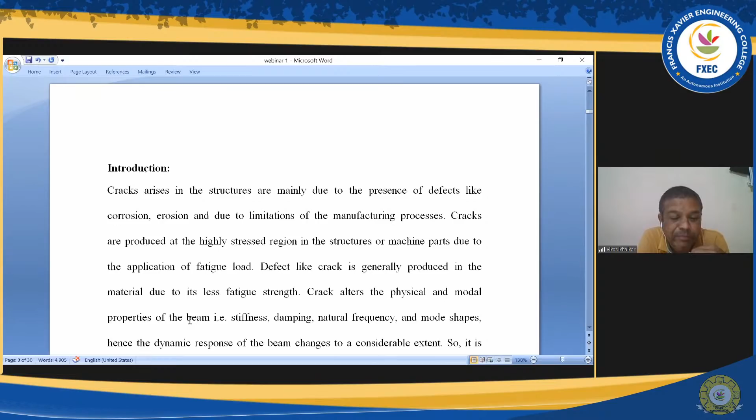Our expectation is that the structure should not fail. Because of that, we should do structural health monitoring of the cantilever beam. Suppose the cantilever beam is carrying a crack, then in the earlier stages only we should locate or identify the presence of cracks in the cantilever beam, so that we can avoid catastrophic failure. Because of that, this study is very important.

Vibration based crack detection is divided into two types. One case corresponds to the forward problem, and another is the inverse problem.

Now I will give some introduction regarding the forward problem. In the forward problem, what do we have to do? Artificially, we take cracks on the cantilever beam, and we disturb that cantilever beam using an impact hammer or vibration exciter or something like that. We check how the dynamic response of the cantilever beam changes. Dynamic response means natural frequency, resonant amplitude, stiffness, mode shapes, and all that.

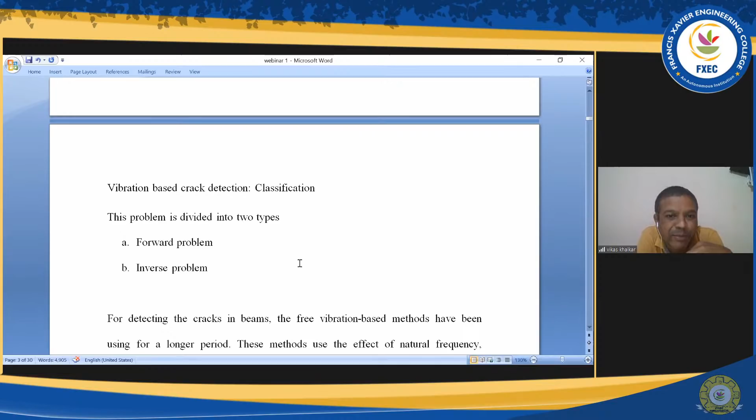Now we will look into the first case. The title of the first case is: study of free undamped and damped vibrations of a cracked cantilever beam. It is better to explain with the help of a diagram, so I will do that. In this particular study, I have considered 21 crack cases.

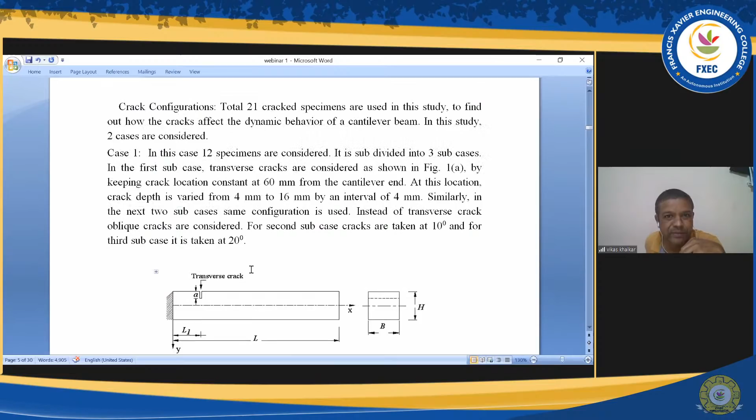On some specimens I had taken transverse cracks, and on some specimens I had taken oblique cracks, meaning 10-degree oblique crack, 20-degree oblique crack, and so on. I studied how the dynamic response of the cantilever beam changes because of the presence of transverse cracks and because of the presence of oblique cracks.

Now the question is why I considered transverse crack and oblique crack. Suppose our structure is carrying some localized defect right now, it is not necessary that the defect should be like this one; sometimes the defect will be oriented differently.

Your localized corrosion will be like this. Sometimes the orientation of the localized corrosion will be like this, and sometimes it will be like this.

Suppose our cantilever beam is carrying an oblique crack, then we must know the effect of oblique cracks on the cantilever beam. Now suppose our cantilever beam is carrying a transverse crack, then we must know the effect of transverse crack on the dynamic response of the beam. Cracks will definitely be either transverse type or oblique type, and we should know how the dynamic response is changing for these kinds of cracks.

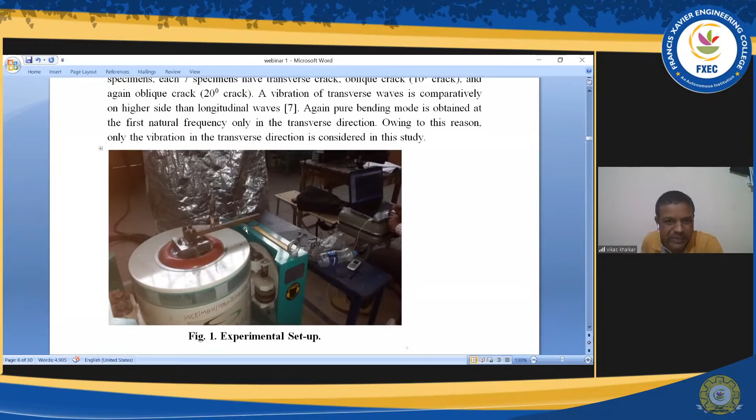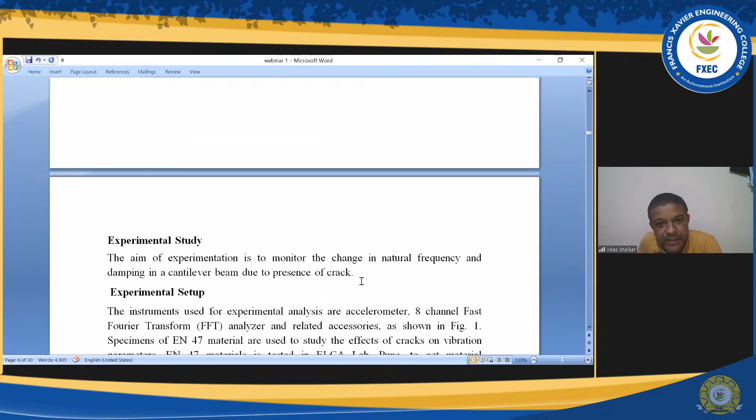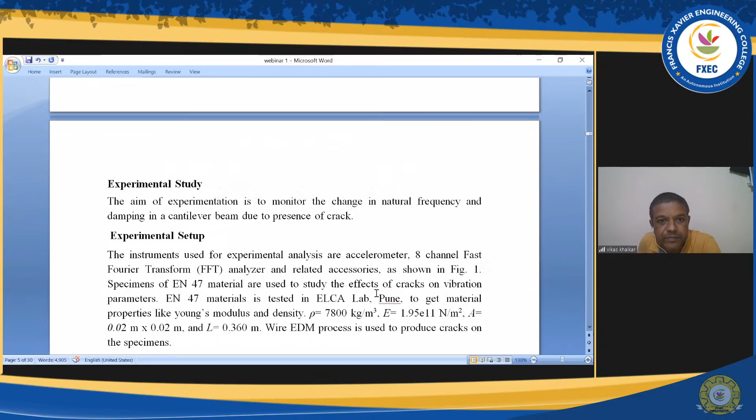I will show you the geometric properties I had taken: the cross section is 20 mm by 20 mm, and the length I had taken is 360 mm. These are the material properties I used; in earlier days I had tested all these properties in ELCA Lab, Pune.

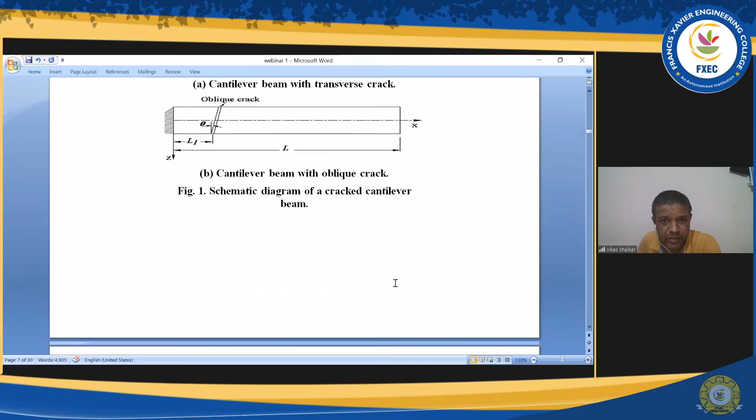In the finite element analysis, first I created a model with these geometric properties, and afterward I created required cracks at the required locations. Afterward, I meshed the finite element model using the solid 186 element. I used solid 186 elements because this is a 3D model, and due to that I preferred solid 186 element for meshing this particular model.

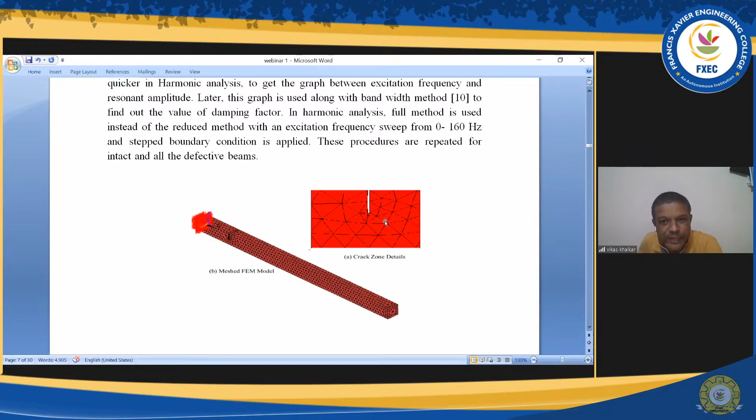Now, using this particular graph, I had calculated the value of natural frequencies and damping factor.

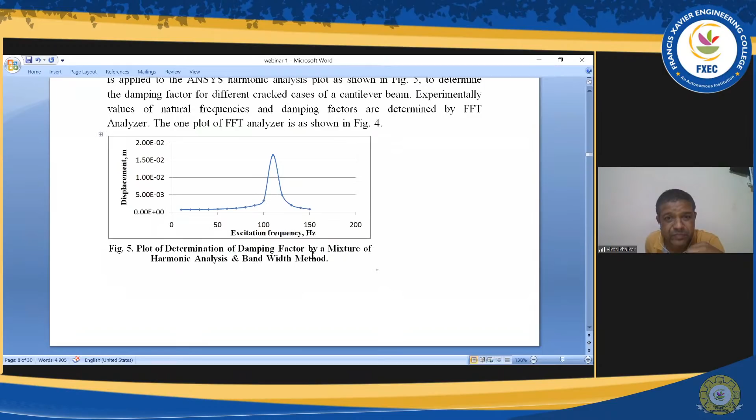For calculating the value of damping factor, I used this curve. One formula is there: 2 zeta equals f. What I did was plot one horizontal line at a distance of 0.707 times of this peak amplitude. I got a line over somewhere here, and this was f2, this was f1, and using the bandwidth method, I calculated the value of damping loss factor: 2 zeta equals f2 minus f1 upon natural frequency.

Peak means this highest point we have to project on the x-axis, and that point, that line, will intersect the x-axis over here, and this point will give us the value of natural frequency. So this is natural frequency, and f2 will be this value, f1 will be this value. And the distance of this horizontal line is 0.707 times of the peak amplitude.

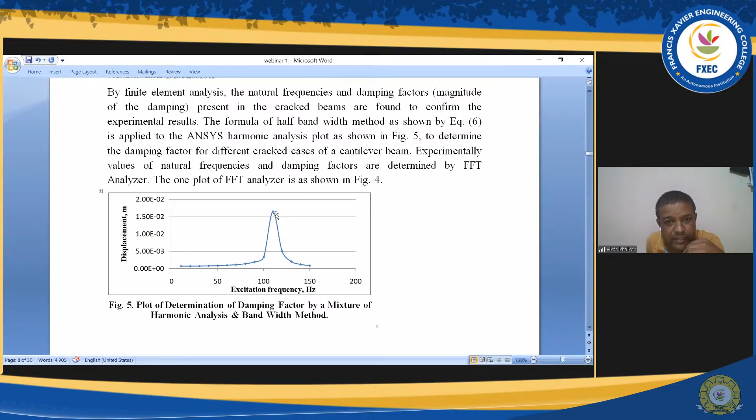Now I will expand the number of graphs. First graph is between variation of natural frequency ratio versus crack depth ratio.

Now first of all, we must know what is natural frequency ratio. It is the ratio between natural frequency of cracked beam to the natural frequency of uncracked beam. It is called natural frequency ratio. The value of natural frequency of uncracked beam is always greater than natural frequency of cracked beam, so if we are considering a crack beam, the value of this ratio is definitely less than 1, because the natural frequency of crack beam is always less than that of uncracked beam.

And the x-axis indicates crack depth ratio. Now what is this crack depth ratio? From the diagram I will show you. A indicates crack depth and D indicates depth of the cantilever beam. Then what is crack depth ratio? It is the ratio between depth of the crack and depth of the beam. It is called crack depth ratio. I think you all understood.

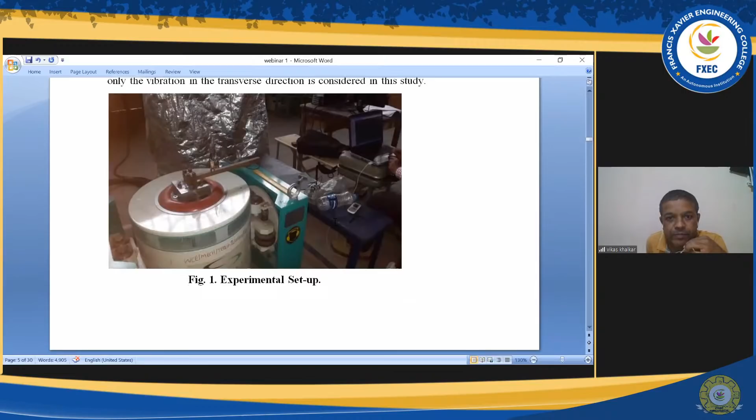Suppose we are increasing the depth of the crack in the beam, at that point what will happen? The value of natural frequency ratio is going to decrease. Here I used the symbol R for indicating the natural frequency ratio. Once again, suppose we are increasing the depth of crack in the beam, then the value of natural frequency goes on decreasing.

Now what is the reason? Suppose we consider a small crack depth, this particular point - since the value of crack depth ratio is less, we are considering small crack depth, and for small crack depth the value of natural frequency ratio is large. Suppose we consider this particular point, where value of crack depth ratio is more, then we get less value of natural frequency. And for this particular point, value of natural frequency is least.

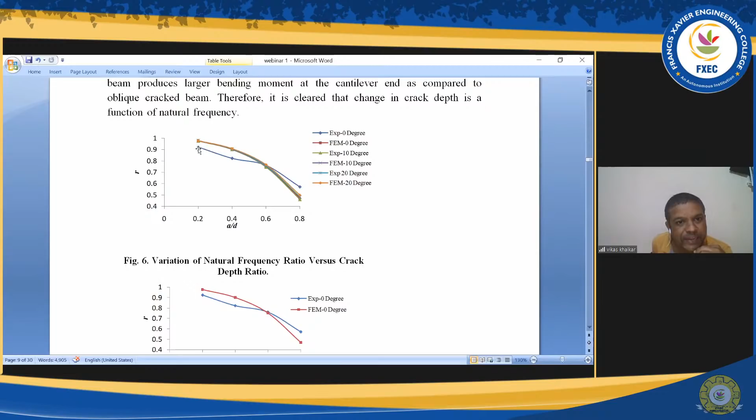That I will show you over here. For 20 degree crack it is maximum, for 10 degree crack intermediate, and for transverse crack or 0 degree crack comparatively less. Now I will explain this from this diagram.

This is transverse crack. Because of the transverse crack, the largest value of bending moment is produced at the crack. Now suppose we are considering an oblique crack in the cantilever beam. At the same location we have to take one crack, and we have to maintain the same crack depth. Suppose we are considering two cases, a case of transverse crack and a case of oblique crack. Then location and crack depth

we are not supposed to vary. We have to maintain the same location for this crack, and we have to maintain the same crack depth for this crack and for this crack case. We just have to change the orientation of the crack. This is transverse crack, meaning your crack will be like this in the top view, and in the oblique crack it is like this.

Because of the presence of transverse crack, the largest value of bending moment is produced at the crack, and because of that the effect of damping remains comparatively more for this particular case. Now see this oblique crack. In this oblique crack, it is going towards the free end. This is the free end, and this oblique crack is going towards the free end, like this.

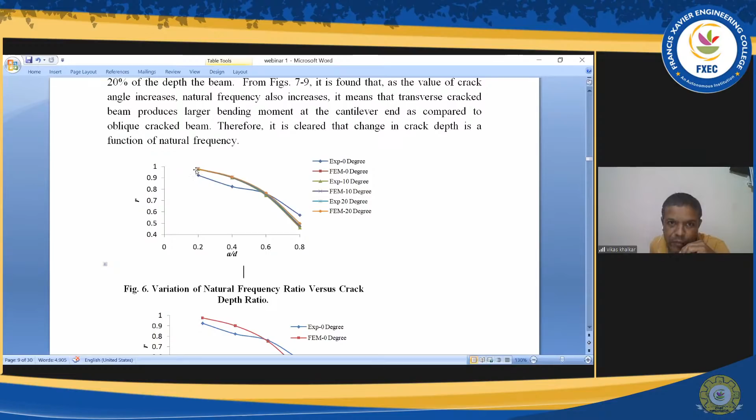and because of that for this case we are getting a comparatively larger value of natural frequency. That I will show you over here, for 20 degree crack. Just see, for 20 degree crack we are getting a larger value of natural frequency, because whatever damping effect we get at the crack, it is comparatively less with respect to the case of transverse crack. Because of that we have got the largest value of natural frequency over here.

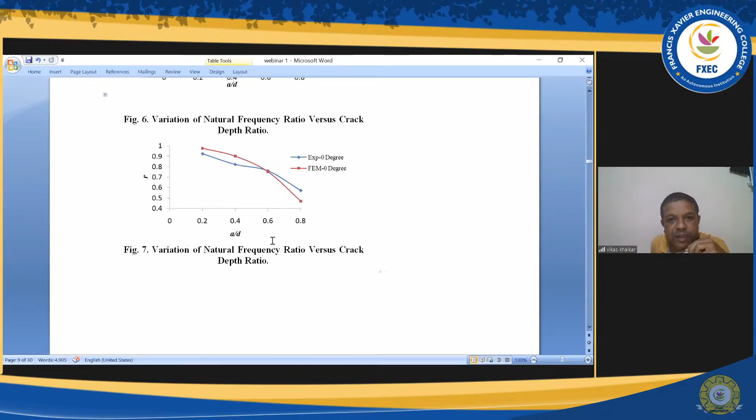This is all about the interpretation, and this graph gives the relationship between variation of natural frequency with respect to crack depth ratio for 0 degree crack, for 10 degree crack, and for 20 degree crack. All these graphs are included in this case, meaning these are the detailed views, detailed graphs.

Now the next point is the variation of natural frequency ratio versus crack location ratio. Natural frequency ratio you already know, so now I will focus on crack location ratio. What is crack location ratio? I will tell you, so that you will understand. It is indicated using the symbol L1 by L. I will show you over here.

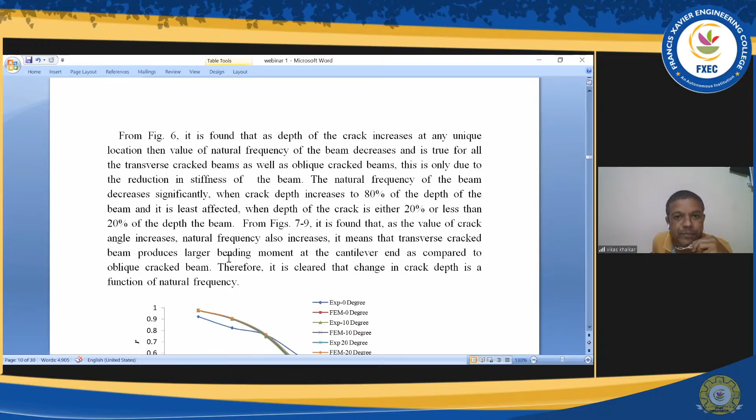Once again, I should show you this diagram. What is crack location ratio? It is the ratio between L1 and L. Now what is L1? L1 is the distance between the crack and the cantilever end. So when the value of crack location ratio is 0.5, we consider the crack to be at the midpoint.

Okay, now see this graph. We have to study the relationship between natural frequency ratio and crack location ratio. For this, we take 4 specimens, and on all 4 specimens we maintain the same crack depth - we are not supposed to change the depth, only the location. On the first specimen, we provide the crack at 60 mm from the cantilever end. On the second, at 120 mm. On the third, at 180 mm. And on the last, at 240 mm from the cantilever end.

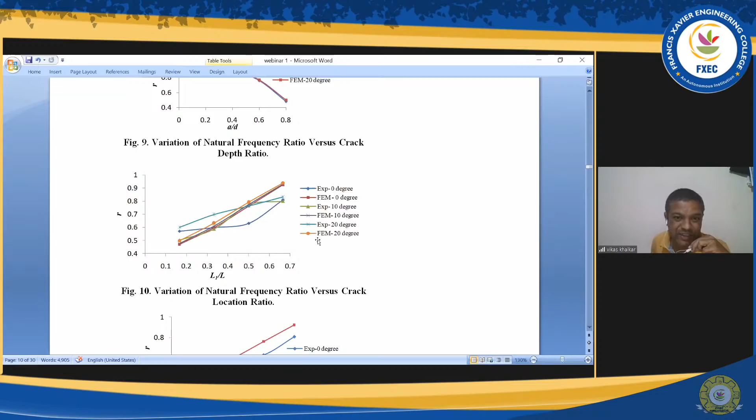You can see this from the straight line. Now for this, there are some interpretations that we will see with the help of this diagram. Suppose we are providing the crack at these particular locations - suppose this is the location of the first crack. Since this crack is nearer to the cantilever end, it is going to produce the largest value of bending moment, or the largest damping effect, in the cantilever beam. And since this case produces the largest damping effect, the value of natural frequency will be less.

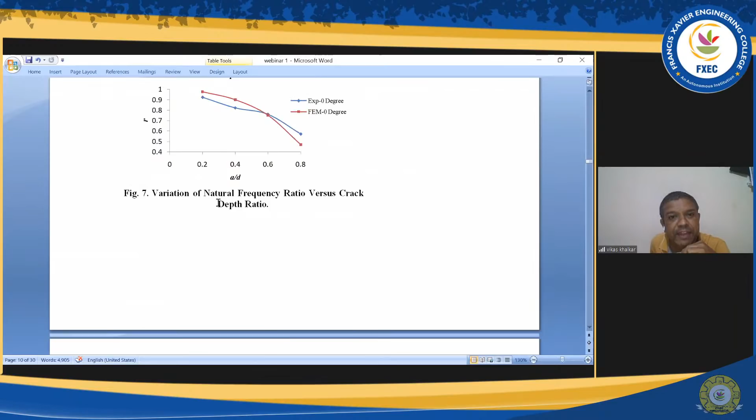So for the first case, the value of natural frequency is less. Then in the second case, we have to increase the distance of the crack. In the first case we had considered the crack over here; in the second case we consider the crack further along, meaning we increased its distance from the cantilever end. When we test such specimens, we find that the damping effect at this crack location is comparatively less - meaning less resistance to vibration - and because of that, the value of natural frequency increases. So for the second point, the value of natural frequency is comparatively more. I will show you this again.

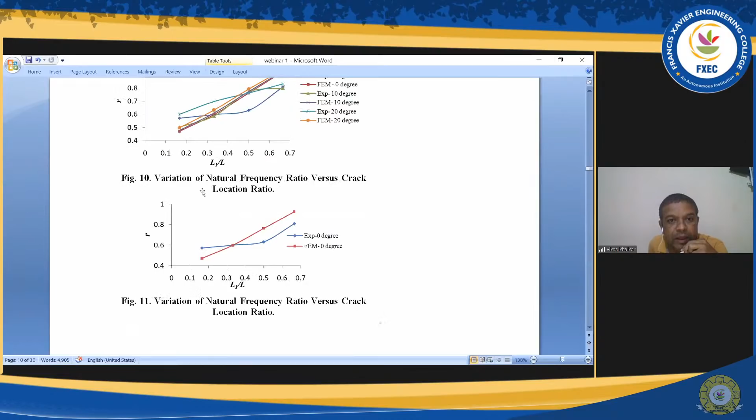For the second point, the value of natural frequency is comparatively larger. For the third case, we again have to increase the distance of the crack from the cantilever end and test the specimen. Then at the crack, the value of bending moment or damping effect will be comparatively less. Compared to the earlier locations, whatever value of damping effect we get here, there will be less resistance to vibration of the cantilever beam, and because of that the natural frequency improves, giving a comparatively larger value over here. For the last case, this particular point indicates that we have provided the crack on the cantilever beam.

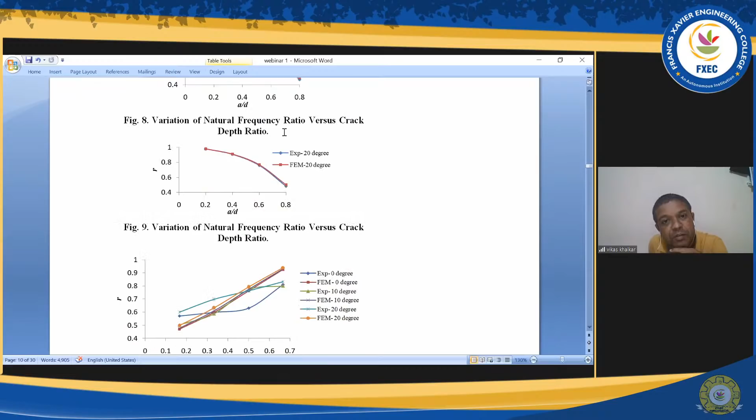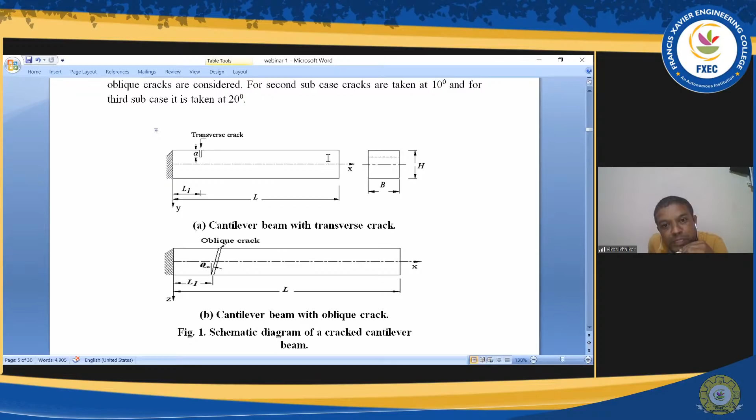In the last case, we have to provide the crack nearer to the free end, either over here or over here. In case number 4, the crack is on the cantilever beam nearer to the free end. Even though the crack is present, we will get the least value of bending moment at the crack. Suppose at this location, even though crack is present, when we see the value of bending moment or the effect of damping at the crack, it will be very less. This means least resistance to the vibratory motion, and because of that the natural frequency of the uncracked beam becomes equal to the natural frequency of this cracked case, giving the largest value of natural frequency for the last location. These are the reasons due to which the value of natural frequency increases as we increase the distance of the crack from the cantilever end.

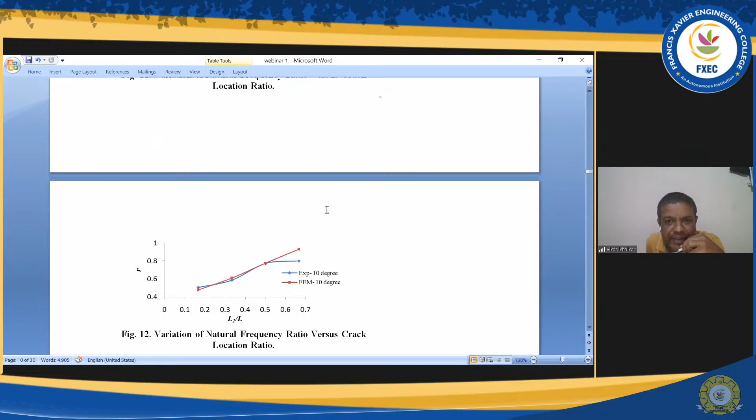And these are the detailed diagrams for transverse crack, 10-degree crack, and 20-degree crack.

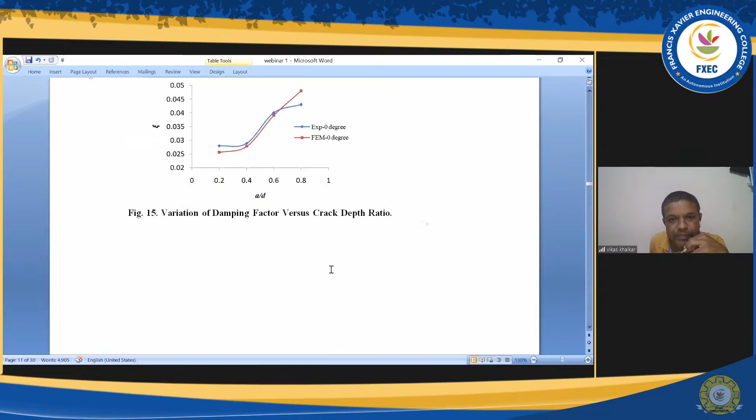I have plotted this particular graph for different cases, for the transverse crack as well as for the oblique cracks. These are the separate cases, and all these cases we have considered in this diagram only. These diagrams show the difference between the experimental and FEM results.

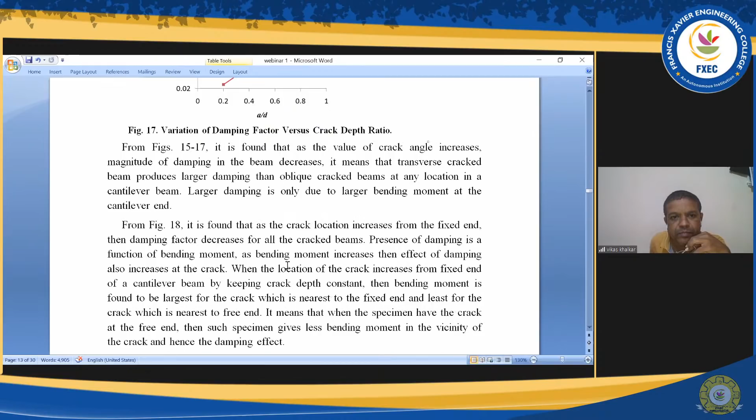Now consider the crack location which is nearer to the cantilever end. In this case, the value of damping factor remains significant, meaning it will be maximum. So how do we interpret this? When we increase the distance of the crack from the cantilevered end while keeping the crack depth constant, the value of damping factor is going to decrease.

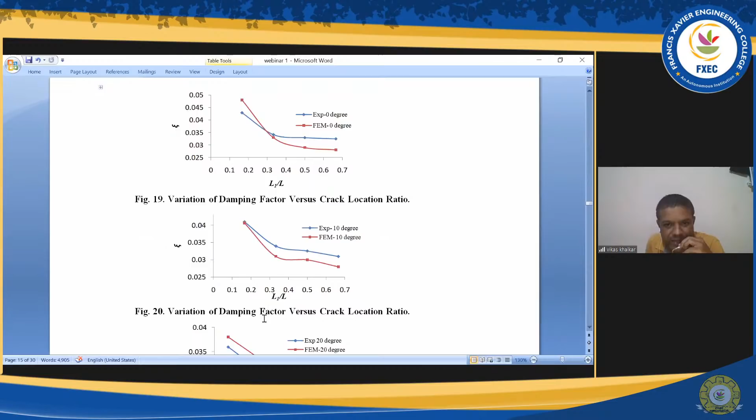The damping factor in the crack beam decreases as the crack angle increases, as I recently explained. For the transverse crack, the value of damping factor is maximum; for the 10-degree crack it is comparatively less; and for the 20-degree crack it is comparatively less still.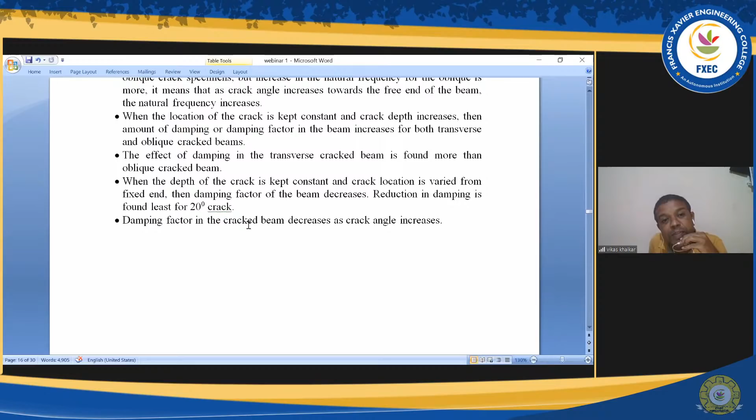So the damping factor in the crack beam decreases as the crack angle increases. I think you got that. Now, case number 2.

Free vibration study of V-shape and rectangular-shape double-sided cracks in a cantilever beam. Suppose we have one cantilever beam carrying a defect — it is not necessary that the shape of the crack is like this, that I will show you.

It is not necessary that your beam should carry a V kind of crack, because through the literature study I found that structures — simply supported beams, cantilever beams or similar — carry different kinds of crack geometries, like V kind of crack, rectangular kind of crack, U kind of crack, and so on.

Right now, suppose the cantilever beam is carrying a crack, and we focus on the shape of the crack. At that time we will find either a V shape, a U shape, or a rectangular shape of the crack. Now I will tell you why I am mentioning all these things.

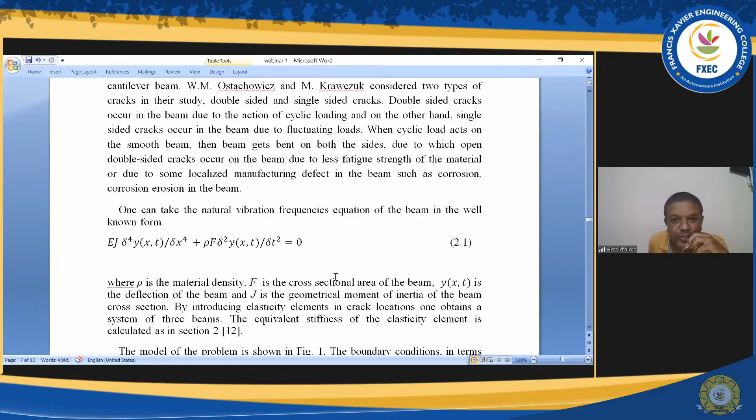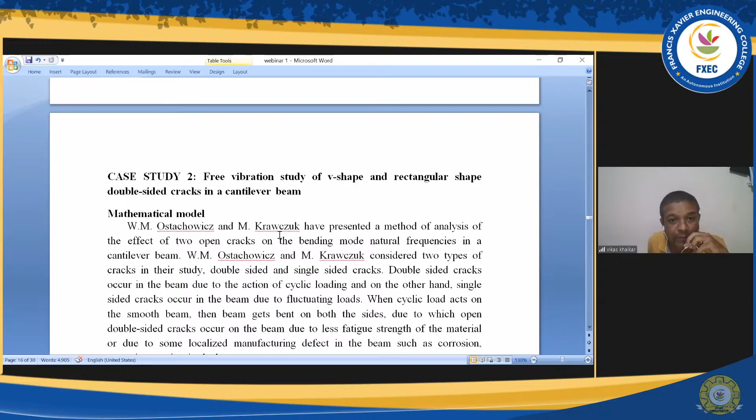In earlier days, Ostachowicz and Krawczuk, two researchers, had developed a mathematical formula for calculating the natural frequency of a cracked cantilever beam. They had derived this natural frequency formula: natural frequency equals characteristic roots upon length of the beam whole square, under root of EJ upon rho F.

Now I will explain all the terms. Beta i is the characteristic roots of the crack cantilever beam. Omega I is the natural frequency of the crack cantilever beam. E is Young's modulus value. J is the geometrical moment of inertia — generally we use the letter I for mass moment of inertia, but here I have taken J. Rho is the density of the material, and F is...

Area, cross section of the cantilever beam. This means they had developed one mathematical paradigm, and at the end they had converged this mathematical formula for the natural frequency.

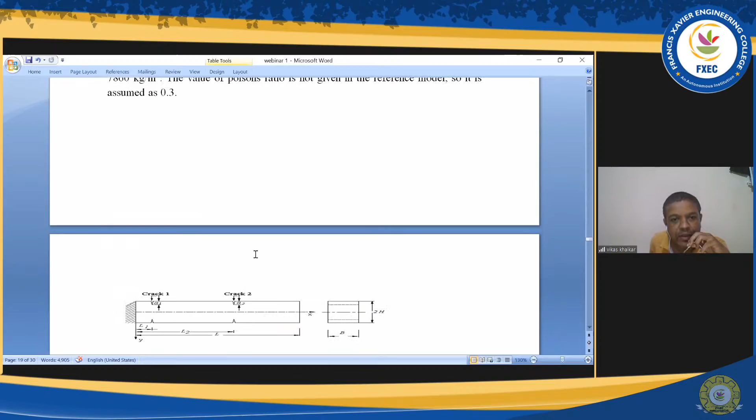Now I will tell you. Suppose a crack cantilever beam is carrying two cracks from one side, or suppose cantilever beam is carrying four cracks like this - two cracks from top side and two cracks from bottom side. Suppose we have to compute the natural frequency of this cantilever beam, then you can make use of this formula.

Suppose cantilever beam is carrying these kinds of cracks, then it is very difficult to calculate the natural frequency of this particular beam. Suppose our requirement is that finally we need the value of natural frequency of this particular crack cantilever beam. Then what will be done?

For that particular purpose, what I did is I had extended the mathematical model of these two researchers. These two researchers had developed or converged this natural frequency formula for this crack beam. Suppose we have one crack cantilever beam, and suppose that cantilever beam is carrying cracks like this - rectangular kind of crack or U kind of crack. Then we must be able to calculate the natural frequency for this case.

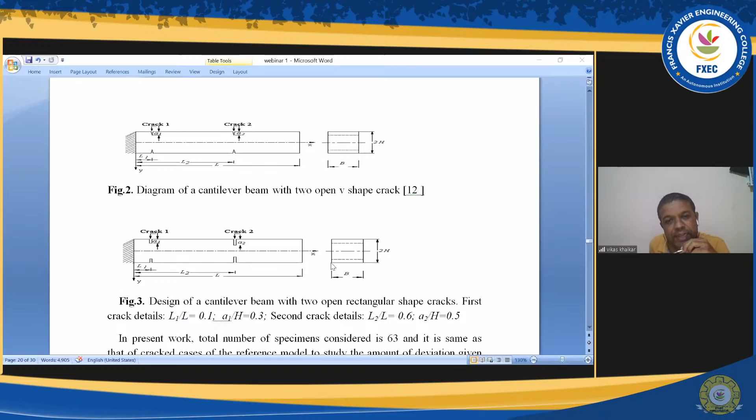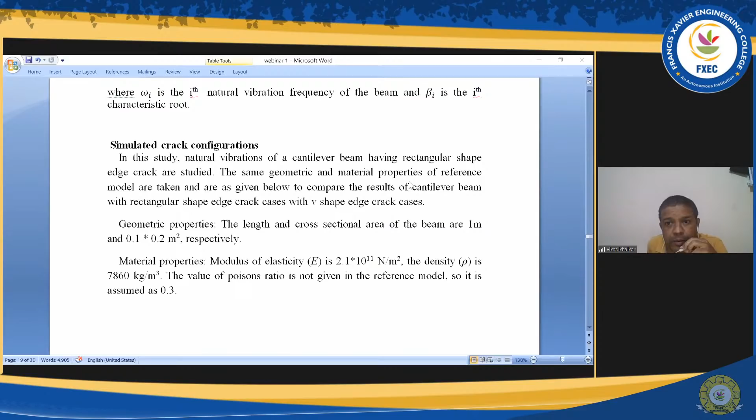Due to that, what I did initially, I had solved... Now I will show you. I had solved a number of cases of the earlier researcher. Now I will show you over here.

For the kind of crack, they had calculated the value of characteristics root. For the first case, they had calculated the value of characteristics root equal to so and so value. This means for a number of cases they had solved for V kind of cracks, they had calculated the value of characteristics roots.

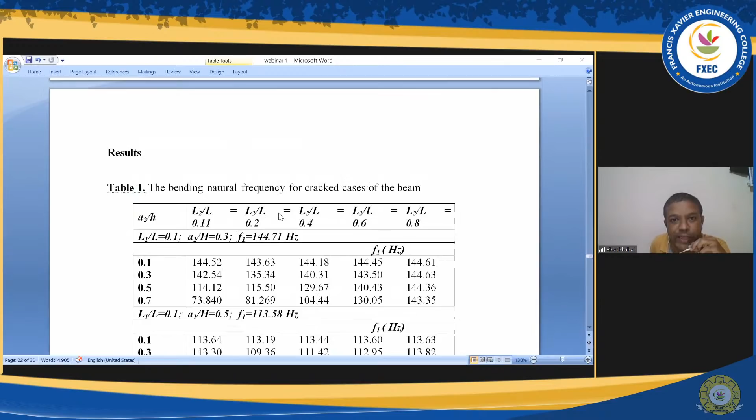Then what I did, I had solved 10 cases. I will explain over here. In case number 1, what I did is I had taken the crack on the cantilever beam, and I had considered V kind of cracks only. I had taken the same geometric properties, the same material properties, and the same types of cracks, like V kinds of cracks on the cantilever beam.

I had done the simulations using ANSYS software for getting the value of natural frequency. When I had solved that particular modal analysis, at the end I had got a number of natural frequencies. Out of that number, I had considered the first natural frequency, taken its value, and substituted it in this formula, and calculated the value of characteristics root for case number 1.

Then for case number 2, once again I had created another model, and I had done the same things, and then I had got the value of characteristics root for the second case. In this way I kept on solving number of cases, and for 10 cases I had calculated the value of characteristics root for V kind of crack. That I will show you the results over here.

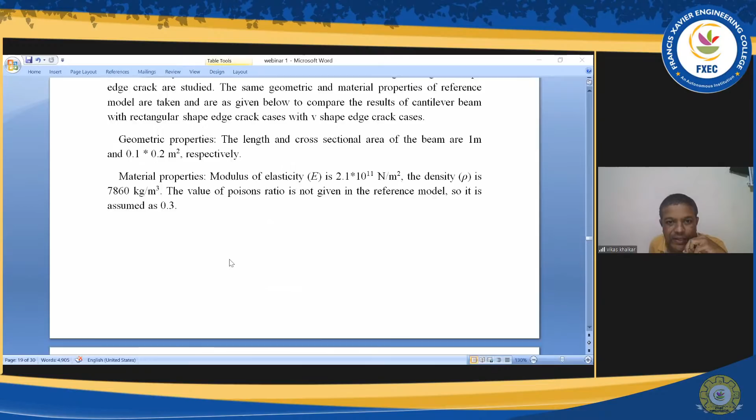In the first case they had got this value of characteristics root, and using ANSYS software I had solved this particular case and I had almost got the same results. Then for this case also I had solved it. I had taken 10 arbitrary cases and solved using ANSYS software, and got almost the same value of characteristics roots for V kind of crack. Then I decided that whatever approach I was following for getting the value of characteristics root is correct.

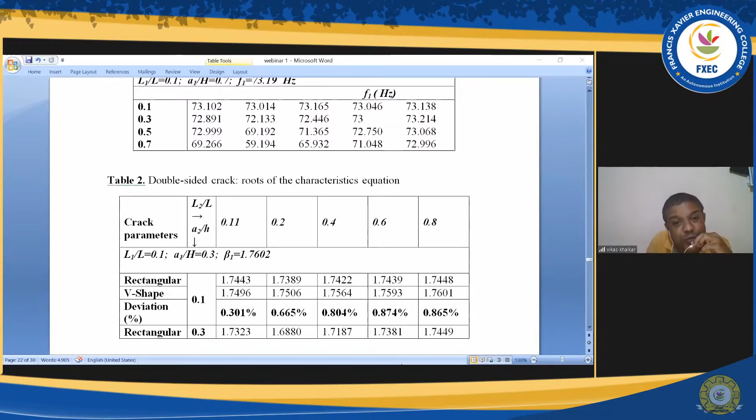Then what I did, I had considered the crack cantilever beam which was carrying rectangular kind of crack, and I had done the same thing - calculated the value of natural frequency, substituted it in this formula again, and calculated the value of characteristics root for the cantilever beam carrying rectangular kind of crack. For all the crack specimens, I had calculated the value of characteristics root using their formulas.

Let me show you. For this particular case, the location of the first crack is 0.1 from the cantilever end, meaning L1 by L is equal to 0.1. This is the crack location ratio for the first crack, and L2 by L is the crack location ratio for the second crack. For the first crack, the crack depth ratio was this, and for the second crack it was 0.1.

In his first case he had got the value of characteristics root as 1.7496. In my case I got this value. In his case he had got this value, and in my rectangular crack case I had got this value. The percentage error was 0.665 and 0.301.

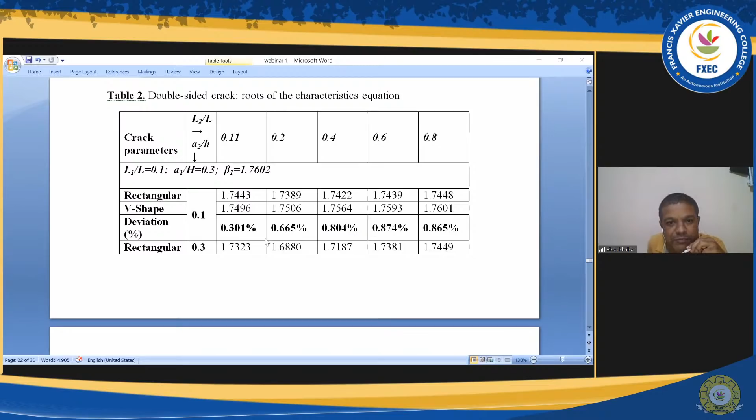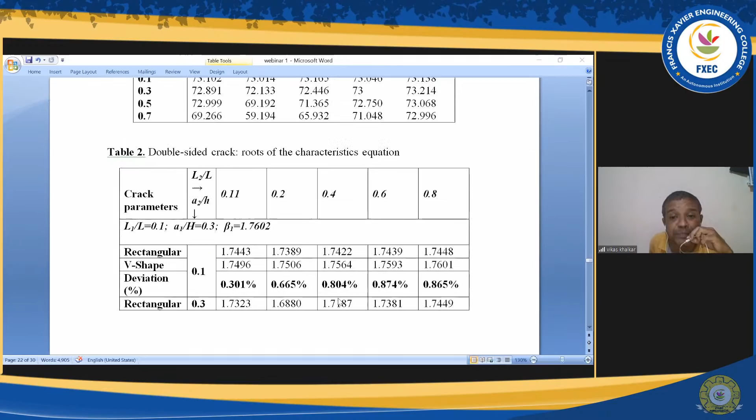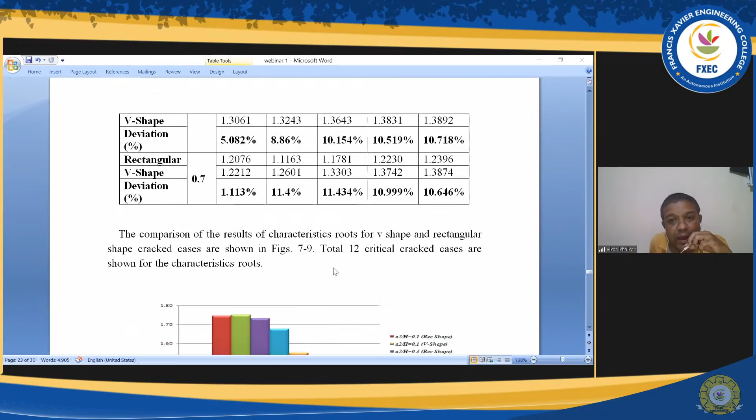Through this study I had found that the mathematical model which had been developed by these two researchers can be extended for the cantilever beam which is carrying a rectangular shape crack. This was the finding of this particular crack case.

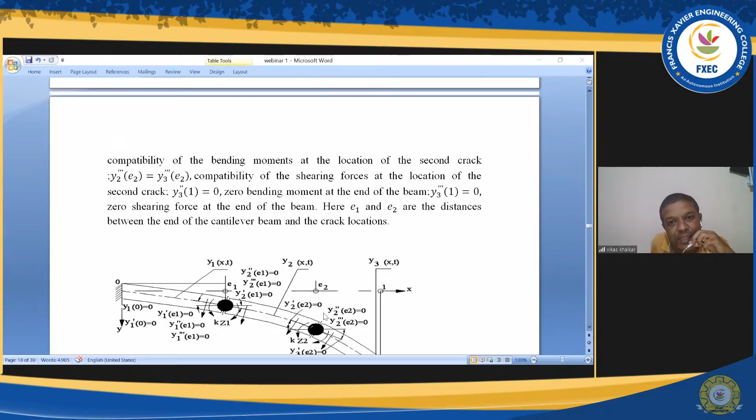Whatever mathematical formula they have developed is applicable for calculating or evaluating the natural frequency of the cantilever beam, which is carrying either V kind of crack, rectangular kind of crack, or U kind of crack. For U kind of crack also, I had published one paper, but that case I had not included in this.

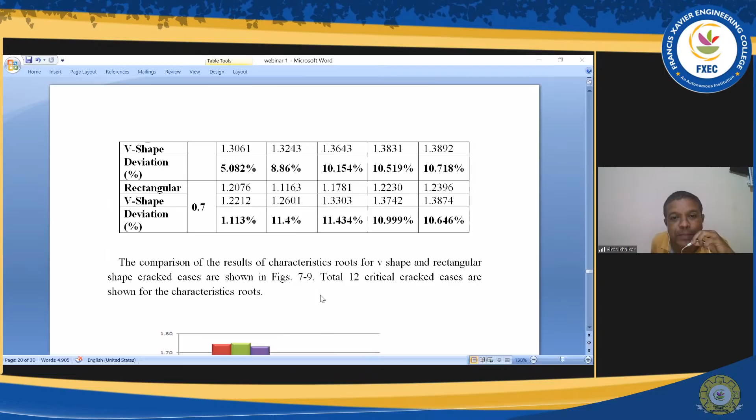Now I will show you the conclusion. This graph is showing the percentage variation in the characteristics root for V shape and rectangular shape crack cases. For A2 by H, meaning for rectangular, we are taking the same crack depth ratio for this kind of crack and that kind of crack. Just see the value of error.

It is like this, a very small error. For this and this case, error is comparatively more, but it is less only, below 11% or something like that. For a very small number of cases, I had got error like 9%, 10%, and for a maximum number of cases I had got less percentage of error.

Just see this particular case, I had got this error. Suppose the value of crack depth ratio is 0.5, then see the value of error for the characteristics root. For this rectangular shape case and V shape case, error is less. Again, error is less. But when the crack depth ratio is larger, then error is

All these points I already explained. Suppose we are increasing the crack depth - now just see, the characteristics root, and omega indicates natural frequency. In the first case, we had studied that when we are increasing the crack depth ratio in the cantilever beam, the value of natural frequency is reducing, meaning the value of characteristics root is also going to decrease.

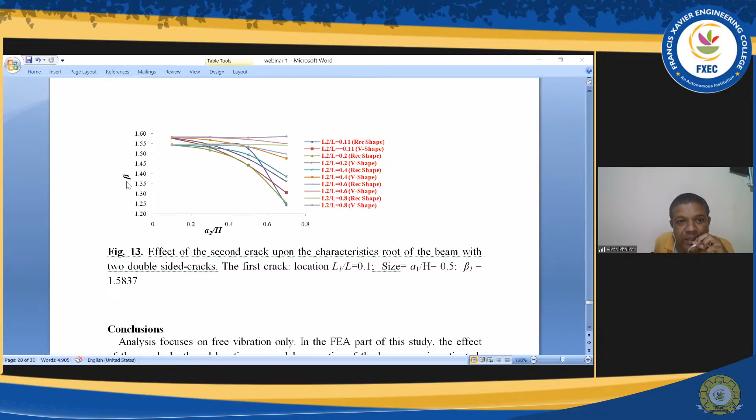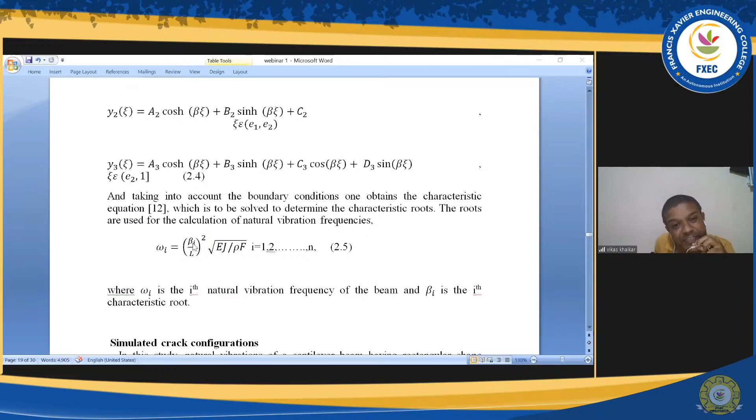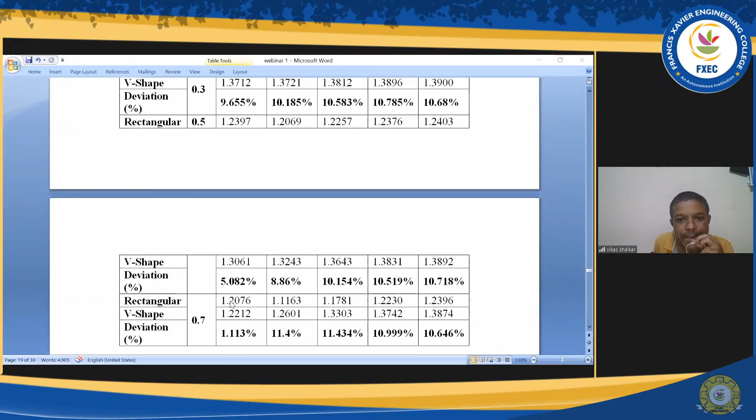I will show you from the formula. Just see this formula - this is natural frequency and this is characteristics root. beta i is on the numerator, and omega i is also on the numerator. In case number 1, we had studied that when we are increasing the crack depth ratio, the value of natural frequency was decreasing. In this case also, the same thing is happening - instead of natural frequency, we are considering characteristics root for that graph, because both are on the numerator. Because of that, the value of characteristics root is decreasing.

And similarly, just see over here, just see this particular graph.

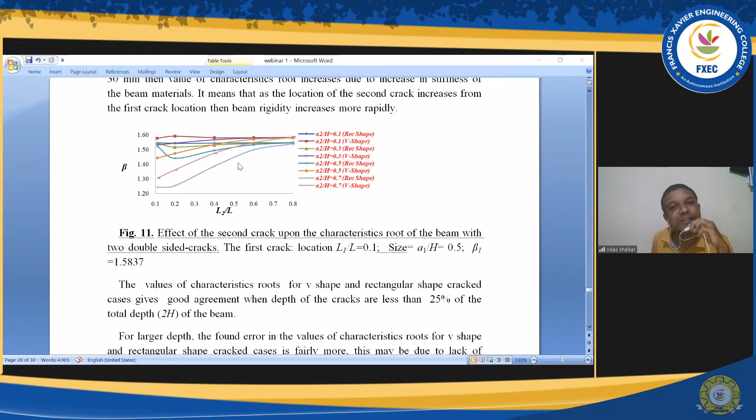Suppose we are increasing the crack location ratio. In case number 1, value of natural frequency was increasing, and here the value of characteristic roots are increasing, because that I already told you.

And these are the conclusions. The theory presented for a cantilever beam which has 2 open double-sided V-shaped cracks is applicable for the same beam which has 2 open double-sided rectangular shaped cracks. This was the main conclusion of this case study.

I think that my presentation is over.

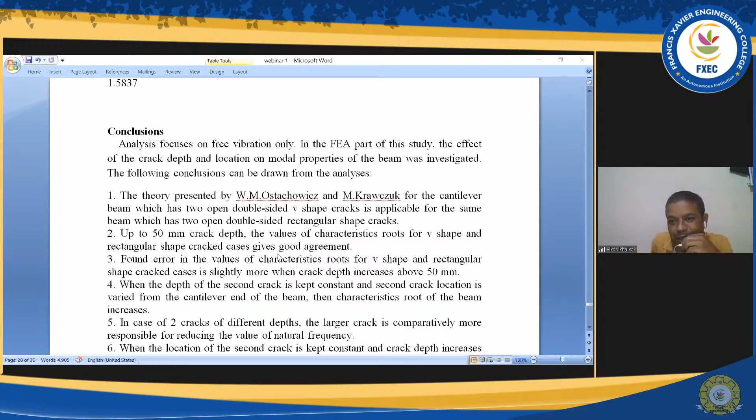Hello. Thanks a lot. Hello, yes sir, thank you sir. Thank you, it is over, sir.

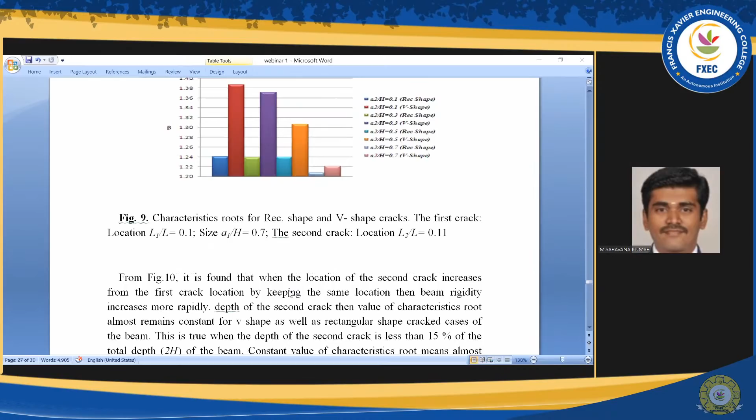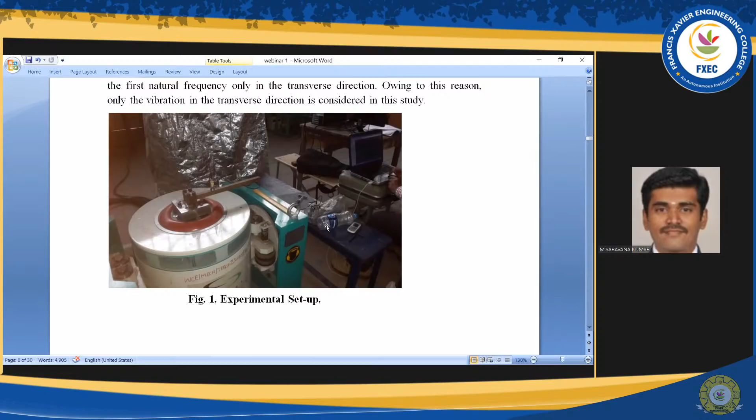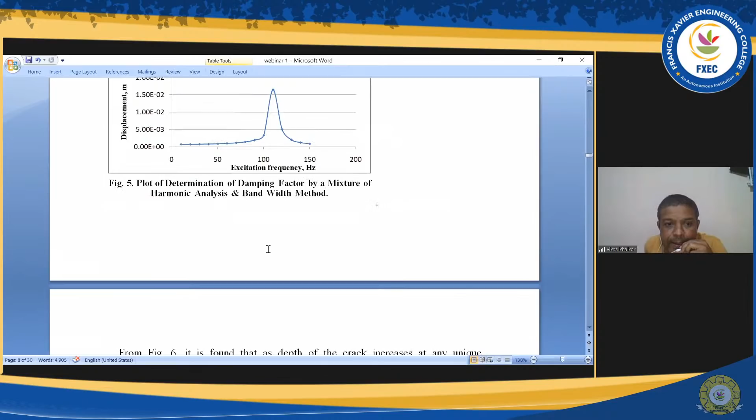Hello? Yes, hello sir, yes sir. Graphs, na? Whatever the page number, tell me. Participant mentioned it is 7 to 8. 7 to 8, na? This one only? Yes sir, let them ask. This one, na? Yes sir.

Yes sir, here the value of natural frequency, error is more, na? He is asking error is more, na? Means for this particular case, just see, yes sir. The reason is that generally

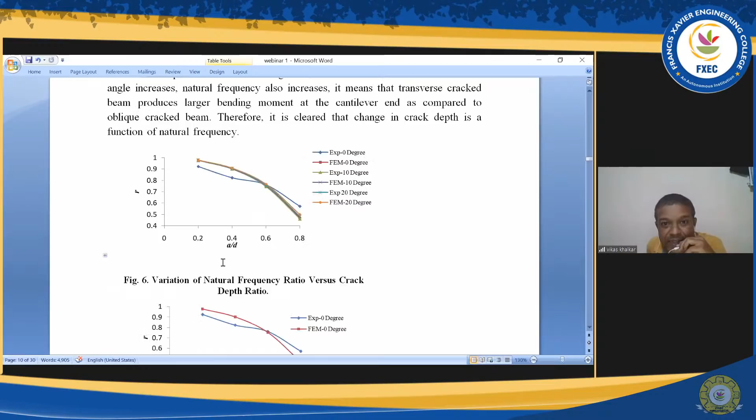we are providing this accelerometer, and for this particular case I had located the accelerometer over here. On the next specimens, maybe location of the accelerometer on the cantilever beam would be over here or over here, and when we are testing, suppose we are exciting the cantilever beam using the impact hammer, at that time what will happen? Beam will vibrate. Suppose beam is vibrating, then what will happen? Your accelerometer is also going to vibrate along with the beam. Means mass of the accelerometer is going to add into the

effective mass of the beam. Because of that, value of error is more over here. Just see, hello, from this location to this location, the value of error is more. Means, suppose we are considering the location of the crack nearer to the free end, and at the same time, what will happen?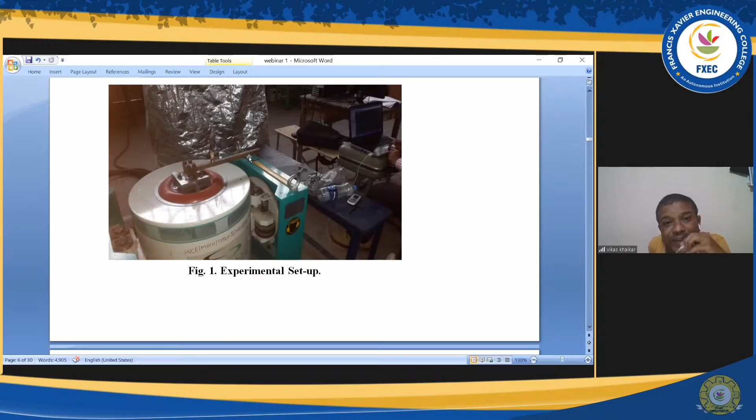The value of natural frequency is going to decrease. We have one formula, under root of k by m is equal to natural frequency. Suppose the mass of the accelerometer is adding into the mass of the cantilever beam, means value of m we are increasing, and due to that, value of natural frequency is going to decrease, and due to that, we are getting more error at one particular location, or when we will increase the crack location ratio.

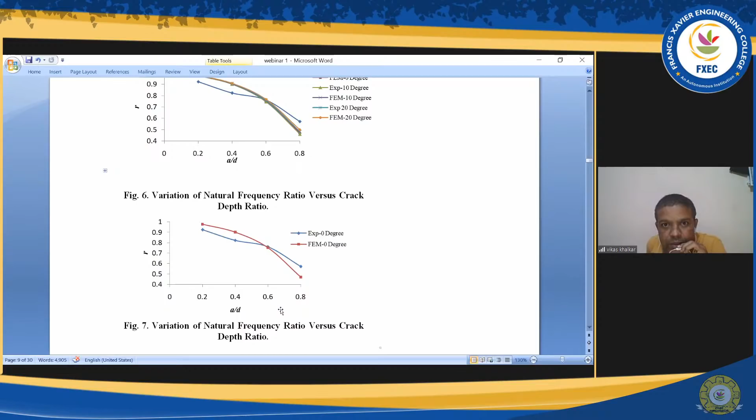Hello. Yes sir, yes sir, audible sir. Audible. Hello, ask him whether he understands or not. Sir, the second question, can I ask the second question, sir? Please ask. Hello, have you got the answer of first question? Hello, yes sir, yes sir. You please tell me from your end. You please reciprocate. Okay sir.

Okay sir, so the second question is: experimental damping ratio, was it also found by half bandwidth method or by logarithmic decrement method? That I will tell you.

Hello, what I did. Hello, this is experimental results. This plot is giving the value of natural frequency right now, and this plot is giving the relationship between natural excitation frequency and amplitude. This axis, y-axis, indicates amplitude right now, and x-axis indicates

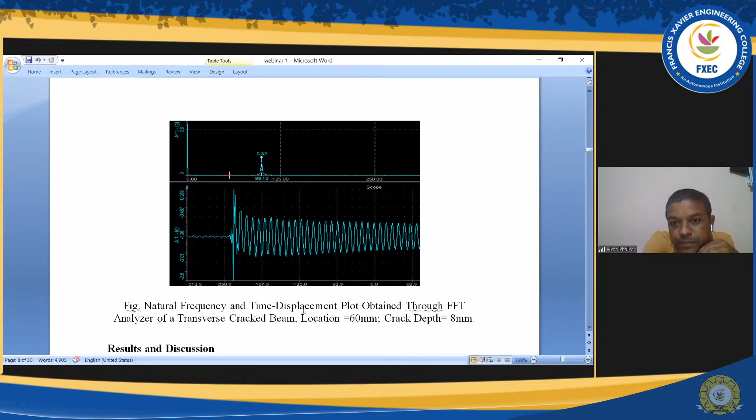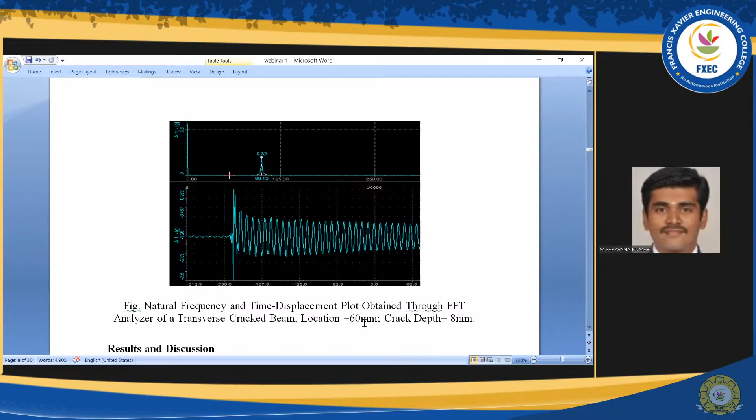excitation frequency. And your question is that how did you calculate the value of damping ratio, loss factor, using half bandwidth method? That is your question, na? Yes sir, yes sir. Now I will tell you, using ANSYS software, I had done harmonic analysis. Hello, listen to me, now I will tell you. Now I got your question. I will take some time on that.

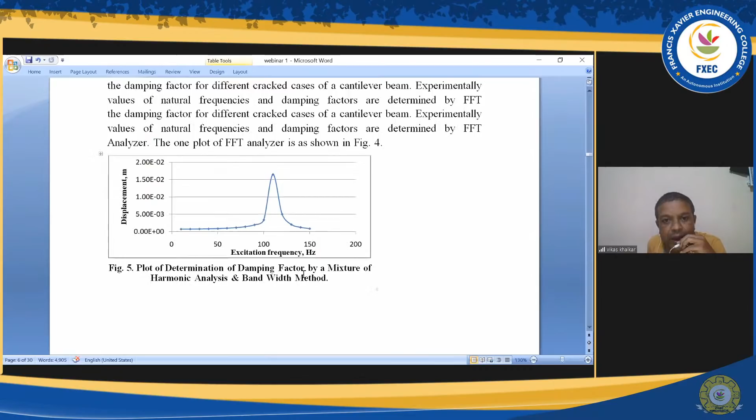Using ANSYS software, I had done harmonic analysis. I had given a sweep of excitation frequency between 0 to 200 hertz. Whatever beam I had considered, it was carrying a certain value of natural frequency. First, from the modal analysis, I understood that the value of natural frequency for this particular case is equal to 115 or something like that. Then I understood that when the value of natural frequency is equal to 115, the value of displacement should be maximum. Accordingly, I had given the sweep of frequency from 0 to 200 hertz.

Are you getting this or not? Yes sir, because I had to take the decision on the frequency sweep. Suppose I am considering taking frequency sweep between 200 to 400, but the value of natural frequency is equal to 115, then my sweep is not correct. Because of that, I had done modal analysis, and from modal analysis I had got the value of natural frequency. It was 115 or something like that, and based on that, I selected the frequency sweep between 0 to 200.

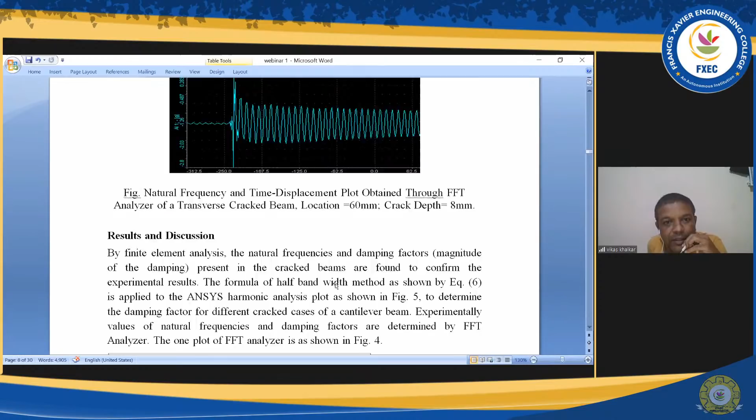Using ANSYS software, I had got this particular graph using harmonic analysis. Then I created one horizontal line which is not shown in this diagram. Suppose the value of displacement is equal to 10 mm. Then my horizontal line distance from the x-axis will be 7.07 mm. Was it like this or not? Yes sir.

The horizontal line is intersecting this graph at this point, and this point will be the f1 frequency, and this point will be the f2 frequency. From this I got the f2 value, and from this I got the value of f1 frequency. Then I substituted the value of f2, the value of natural frequency, and f1 into that formula, and I calculated the value of damping loss factor using ANSYS software. Finally, I used the bandwidth method formula to get the value of damping loss factor. Using ANSYS, I got this particular graph again, and I calculated the value of F2 and F1 using that same concept, and in this way I got the value of damping loss factor using ANSYS and the bandwidth method.

Okay sir. Can we do the same in the logarithmic method, sir?

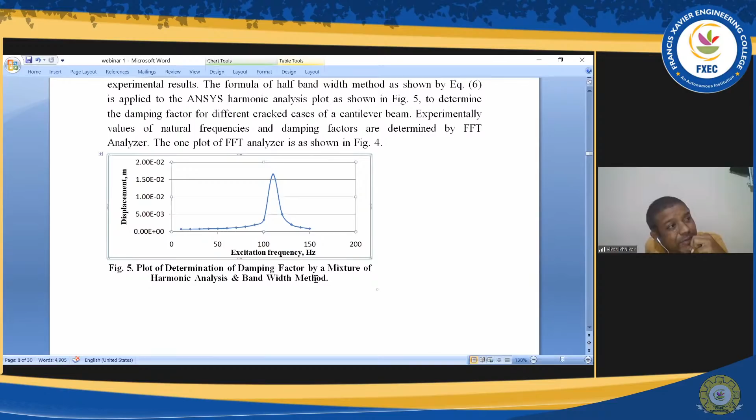Log delta is equal to 1 upon n, where n is the number of cycles we are considering. Suppose we consider 8 cycles, then our ratio will be initial amplitude x0 upon x8, that is 1 upon n natural log of x0 by xn. If we consider 10 cycles, then n gets replaced by 10, and x0 is the initial amplitude, and xn is the amplitude after 10 cycles.

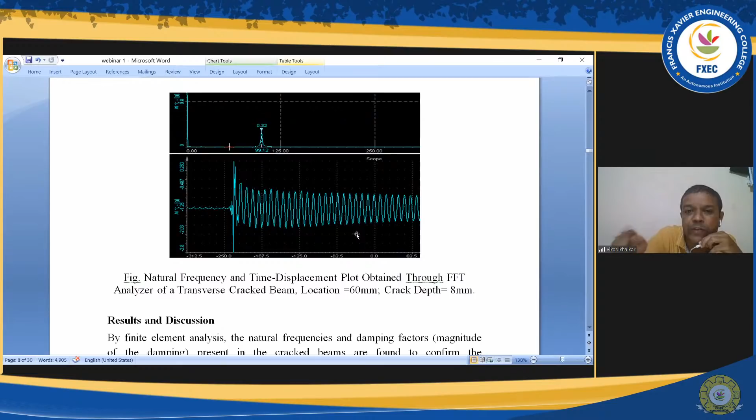Experimentally, what you have to do is consider the initial amplitude, and note where cycle number 10 gets completed. We have to measure the amplitude at that point, and the amplitude after n cycles, say 10 cycles. Instead of x0 we substitute this value, and instead of xn or x10 we substitute that value. Then we get the ratio, take its natural log, and instead of 1 by n we use 1 upon 10. So it becomes 1 upon 10 natural log of x0 upon xn, and this value we get from the experiment.

Okay sir, thank you sir. Sir, last question - R value is 0.5 for a crack near the cantilever end, meaning natural frequency drops 50%. What is the corresponding crack depth for this case?

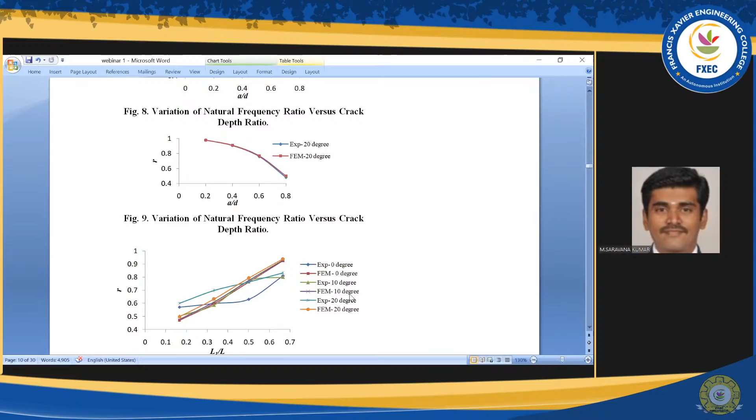I'm repeating the question - R value, page number, show me. They haven't mentioned it. So I will ask the question again, sir: R value is 0.5 for crack frequency ratio at the cantilever end, meaning natural frequency drops 50%. What is the corresponding crack depth for this case? That study I have not done, sir.

Your question is very good, but I do not have an answer for this. Okay sure. So can I ask one more question sir - can cracks of a cantilever beam increase the natural frequencies?

It depends on the depth of the crack. Suppose we are increasing the depth of the crack in the cantilever beam at any unique location, then natural frequency will decrease. The reason is that as we increase the crack depth, we are removing more material from the cantilever beam, and because of that, the value of stiffness decreases. And as stiffness decreases, the value of natural frequency also decreases.

So the final question - shall we take the crack propagation like an X-ray scanner from your analysis? Sir, in that regard, I cannot say anything, sir. Oh okay, sure, okay sir. Thank you sir, thank you for your wonderful presentation sir.

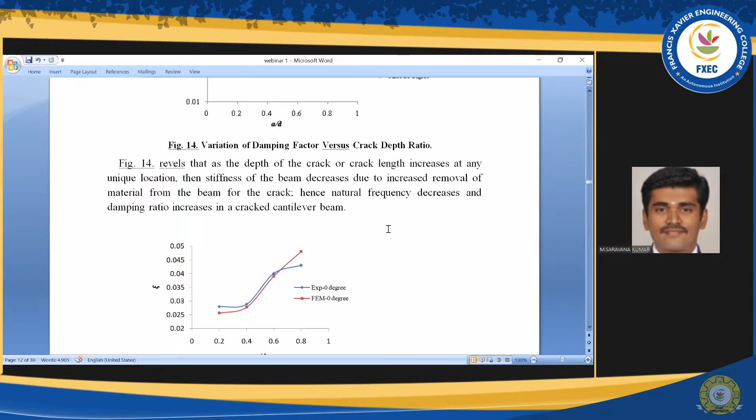There are no more questions from the participants.